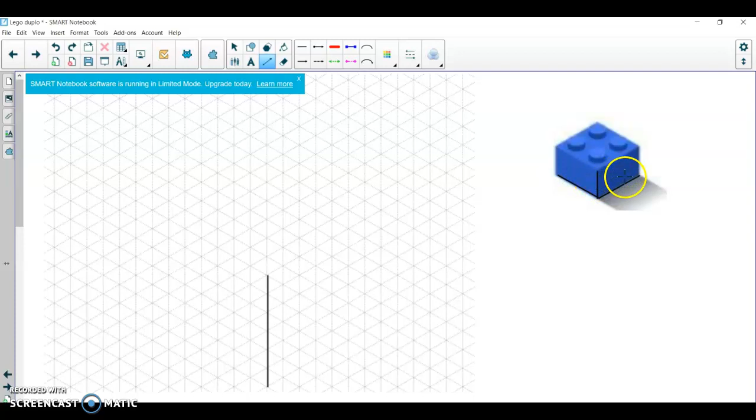I'm going to go ahead now and add this line and this line. The lines represented there are going to be 10 blocks long because they're 1 1/4 inches. So I'm going to count carefully: 3, 6, 9, 10, and 3, 6, 9, 10. All right, now I'm going to go ahead and add these.

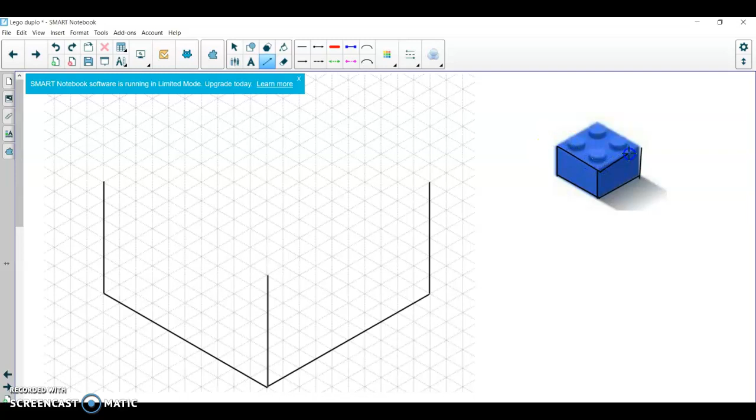These are also heights, so those would be 6 blocks high. So I'm looking at 1, 2, 3, 4, 5, 6. And 1, 2, 3, 4, 5, 6. Now I'm going to go ahead and draw these 4 lines in, which are all 10 blocks long. And it's nice, I have kind of a guide. I'll just connect those tops.

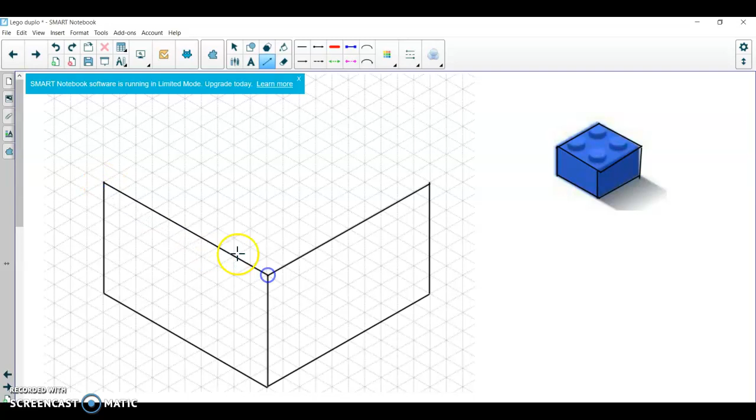I apologize, my default goes off a little bit. I'll go up here to that line. I'll X out of that. And here. Okay, so this is how I see this general box shape. It's kind of difficult here now to go ahead and add my tops here. So I see they're going to be ovals.

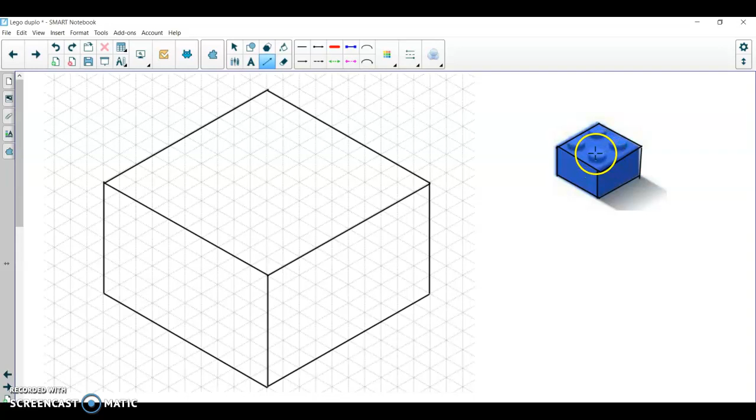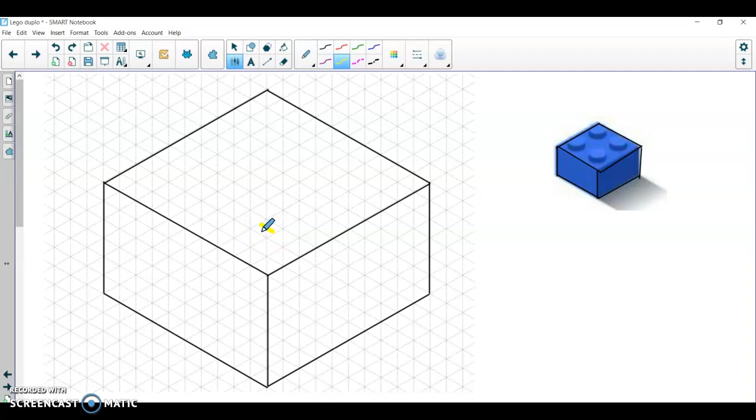The location is difficult with something like this in an isometric, but it's not impossible. I'm going to show you how I would guide it. I'm going to make a couple of yellow pen lines here to help me out. First is the center of that oval. If I go to the top orthographic view, I'd see that the center of my oval is going to be 2.5 blocks in from each side. And then it extends out to where it would touch those 4 dots that I'm making.

So I'm going to have an oval. That would be the bottom of it, and then it's going to project up about 1 1/3 blocks, which would represent the height there. So first thing I'm going to do is drag an oval out and try to size one. I'm going to make it a little bit better line thickness. And then I'm going to guesstimate what I have here, and then I'll manipulate it.

So I'm going to select and drag that over there. All right, so I'm going to put it on there, and then I'll try to drag it out to meet the parameters. And that's not too shabby, actually. You can see I pretty much meet the parameters of touching those. I don't know that I'm going to be able to do much better. Centered around there, certainly has an oval shape, which is what I'm looking for. So I'm going to go ahead and call that good.

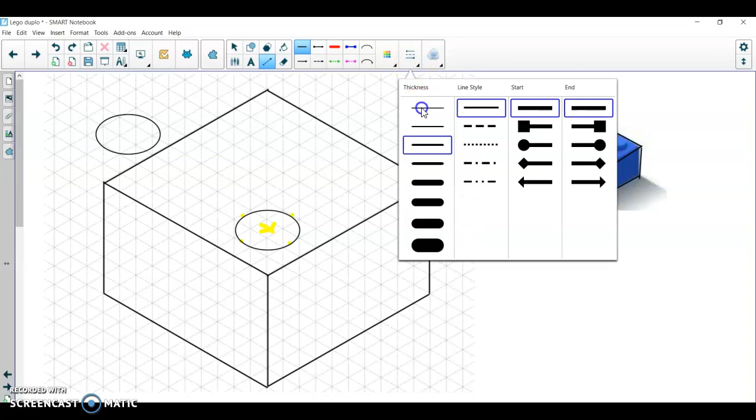I'm going to make a copy of that and put that. I know that's going to exist somewhere up there. How far up? I'm going to need to draw a couple lines to help me determine that. The lines need to be the height of this here. So what is the height of that stud? I could go to my front view and I'd see that's approximately 1.3 blocks or so. So I'll go from the farthest edges of my oval down here, and I'll go up what I perceive to be 1.3 blocks.

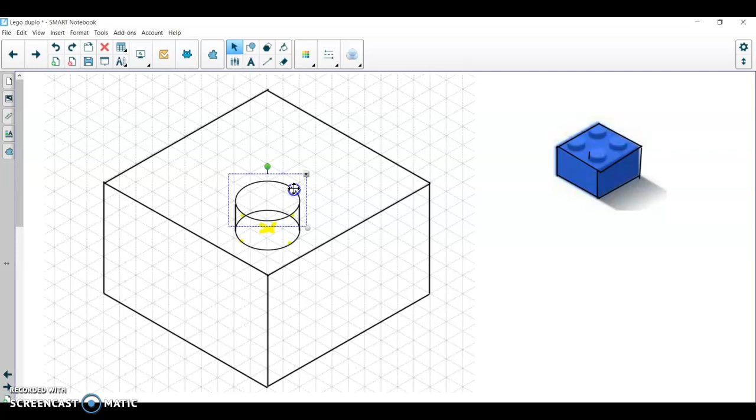And I'll do the same thing over here. I'm going to want to go to the same height. And then I'm going to drag, I don't want to drag my isometric graph paper, but rather this oval that I copied, and set it on there about like that. So that's close, but now in real life I wouldn't see this bottom oval. I would only see the part that's in front.

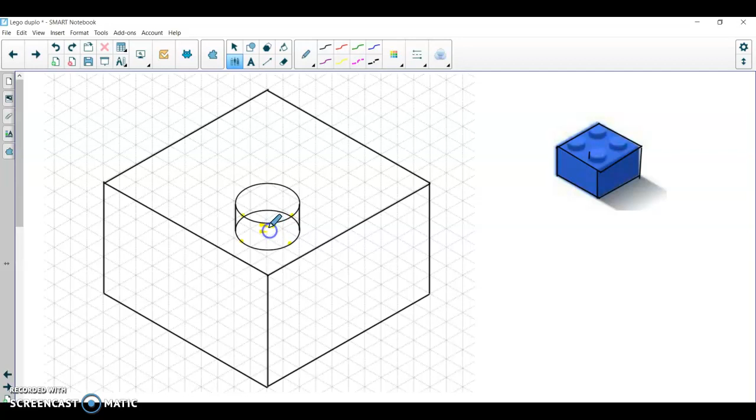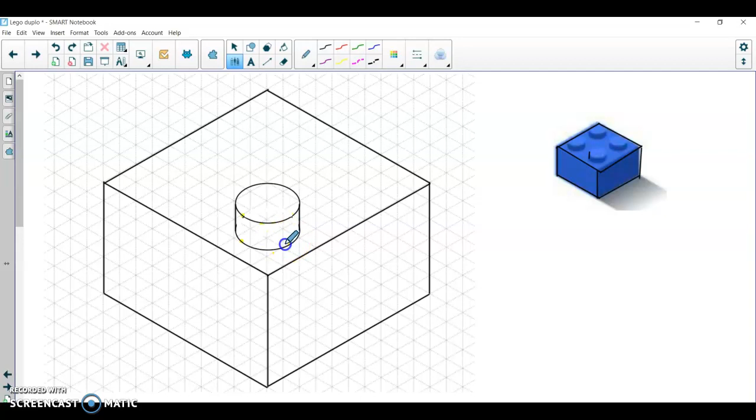So I'll go to a pen and use a white and just try to kind of erase. You can see I can get rid of that mark, so let's see, I wouldn't be seeing that. Again, this is where this program's not really meant to do this, but I think it's a good program to kind of take you through how to make an old school drawing. It's not going to be absolutely perfect by any means, but get rid of some of this here. I think you can get the general idea of how I represented a stud coming out of the top of that.

I'm going to copy this one. I would come in there and shrink this a little bit and see what I can do. Placing that in there, maybe make it a little smaller yet. Ooh, that's pretty good, if you ask me. I don't know that I'm going to do much better in this program, but that would represent this here. Now I can just carefully place these around, and I might run into a problem on the edges and have to erase a little bit.

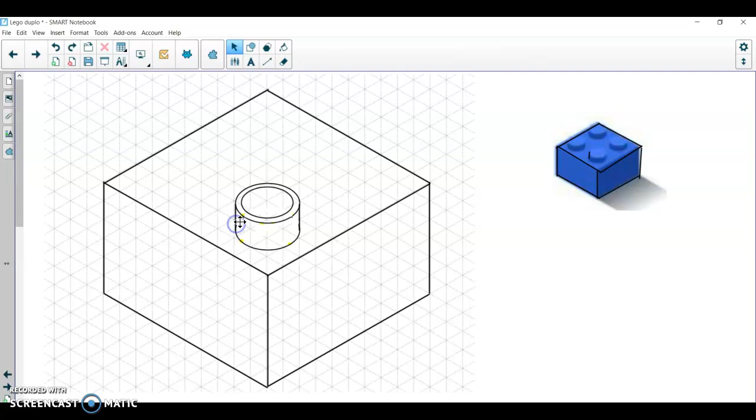We'll see. So I'm going to copy this. I'm going to come over here and click, and then I'll hit Shift to click on the rest, and then I'll copy and paste. You can see that didn't go real well. Rather, I'm going to pause and start back. Okay, so I'm back, and I've placed this relatively carefully. I came to...

Yes, sir. I was wondering, so I cut out all the things I need for my thing. What should I do with it? Yeah, recycling. Okay, sorry I was distracted there, guys.

I apologize. With it paused, I went ahead and laid this on there. Now, some things that I have to do to clean it up. Number one, this line would not be visible behind the stud, so I'm going to have to go through and really clean up that line. I believe that the easiest way would be literally just to go like that and then adjust these in carefully, trying to stay on that line, and you can see that wouldn't be.

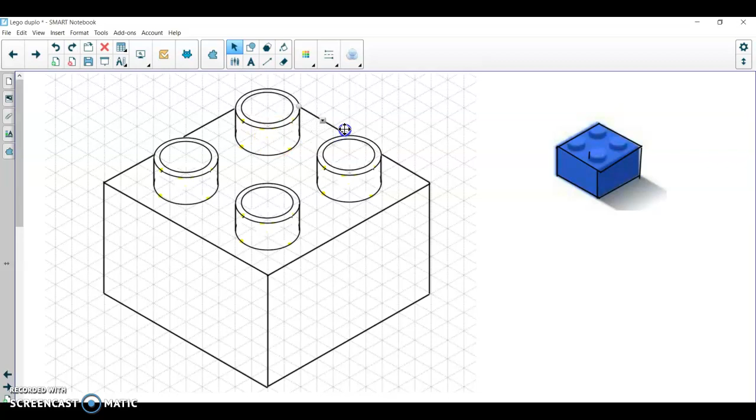So again, now this one will be shortened all the way back here. I know the line it's on, and then by Ctrl and V, I can guarantee the same angle. It's just a matter of doing that. So that cleans it up and gives that appearance that it's behind.

Now these four studs, I want you to notice some things that really do a fine job of location. I'll do it here in a different color, but if you look here along these lines, those pegs are lined up along that. We are one block in all the way around. We are 4 blocks in on that side and what would be on that side, but those are laid out precisely. They're not drawn on there randomly, but even so it's not the best view.

The best view to see the top would be this right here, but short of that, I've still represented clearly that it goes here. So this is what an isometric would look like. This is the front side here. That's the front. This would be the right side, and that would be the top. This is a traditional isometric.

I'm also going to do an isometric of the bottom of it because it's so complex on the bottom with the fins and the center peg that it would be very useful. Again, notice that there are 0 hidden lines. You don't include those on the isometric. This is just a picture there to help me get an overall gauge.